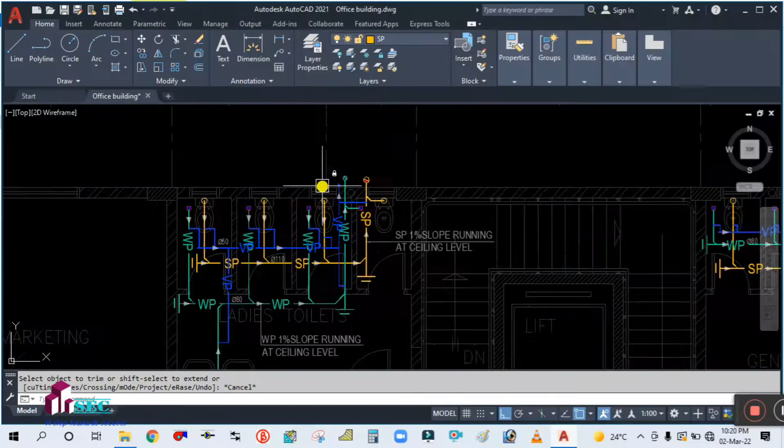As I said in my previous tutorials, we have to do the double line drawing for the first floor as well. So similarly we have to start now.

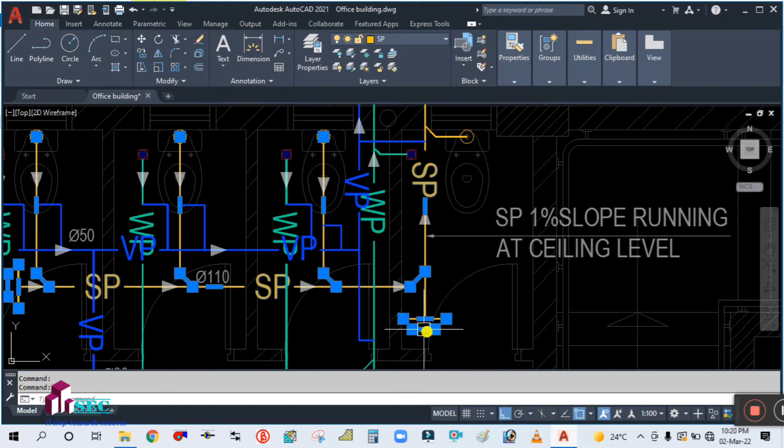So what you will do in the same process, you have to select all this polyline first. Simply select this one and convert to the normal line. Simply select all these. Then after selecting, go to properties and you can find the line type. Simply go to the line type and select the ByLayer.

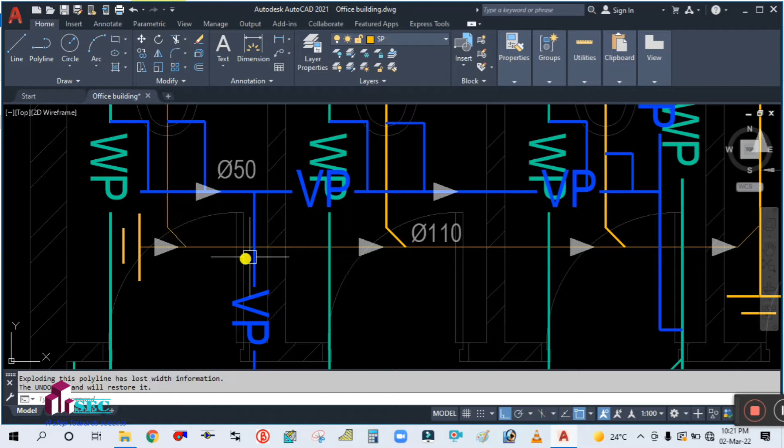Now you need to explode this because this is polyline, so you want to convert into the normal line. Simply select this one, type X, enter. If you want to repeat the same command, no need to press X again and again. Simply select this one and press enter to repeat the command. Select, press. It's very simple.

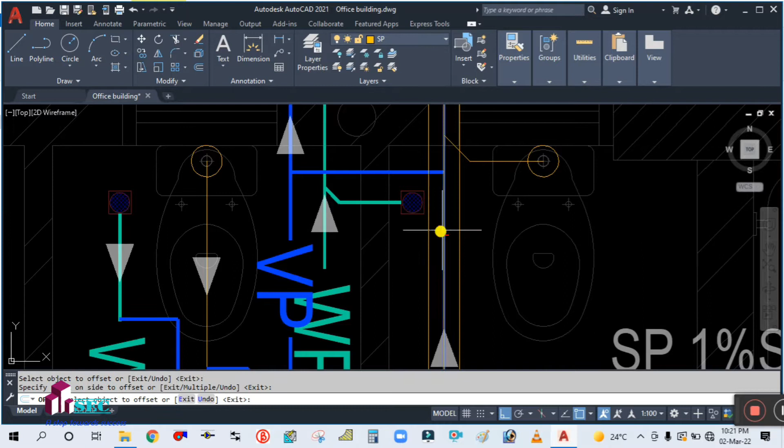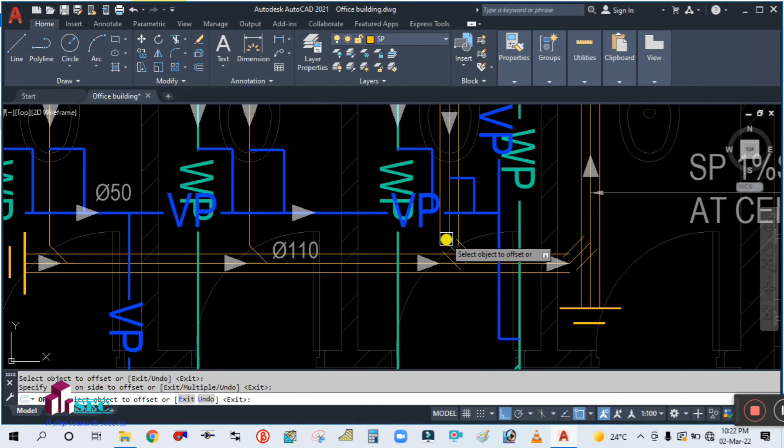Select and press it. Now we have to offset this one, 55 mm each side. Simply offset. It's very simple. Simply select this and offset like this. Simply select this one, offset, select, offset.

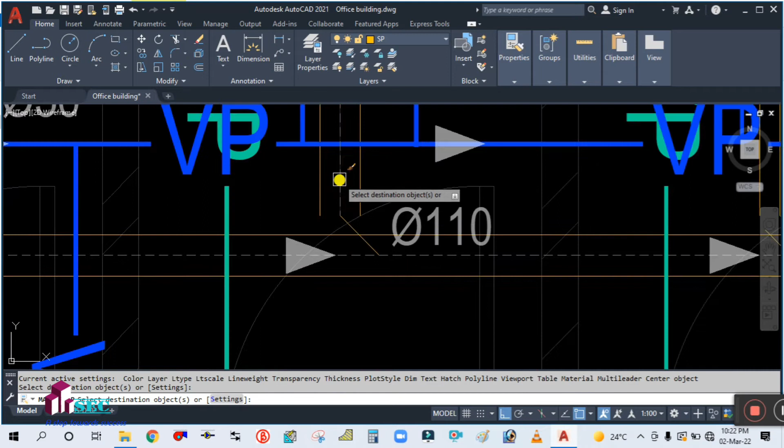Now match this one first. So simply type MA and select the excess line from here, and now this time you need to match this. Simply match this one, match, there you go, match this.

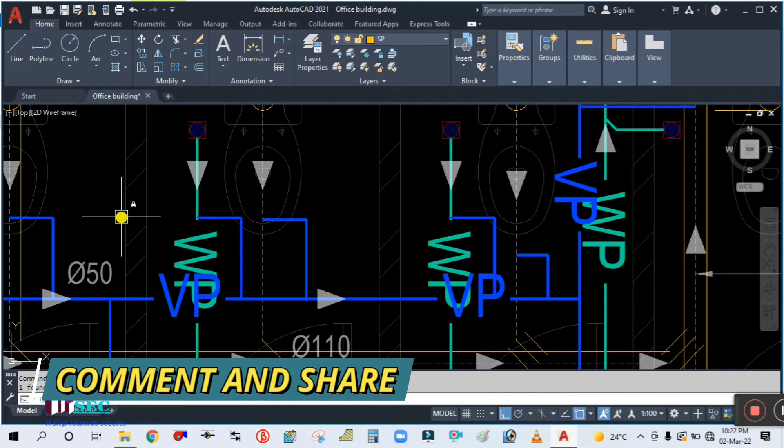Now what you will do, we have to simply erase this one because we are going to copy paste. So no need this line. I am going to remove this.

Now we have to simply copy this fitting from here. Simply copy this one also, from here, up to here.

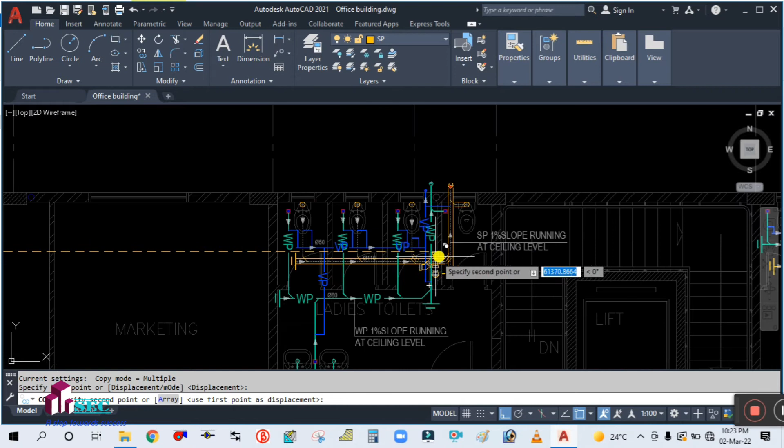There you go. Now what you will do, simply move this. Type M, select this and this also, and now select the center point and place it here.

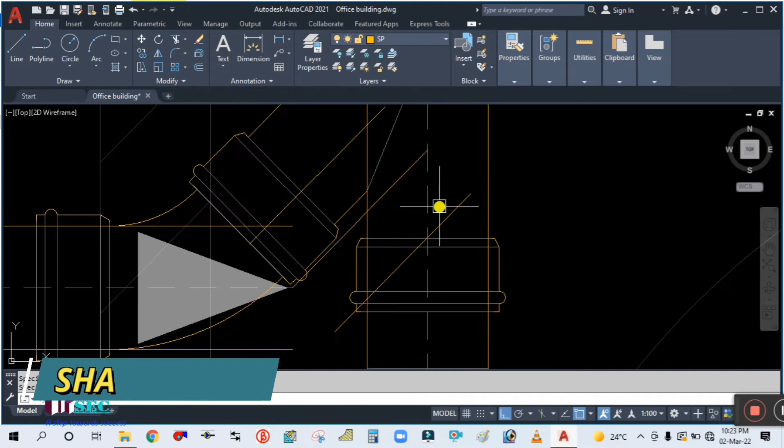Now we have to erase this one, the center line, and then you have to trim. So type TR, select this and this edge, enter, then select like this.

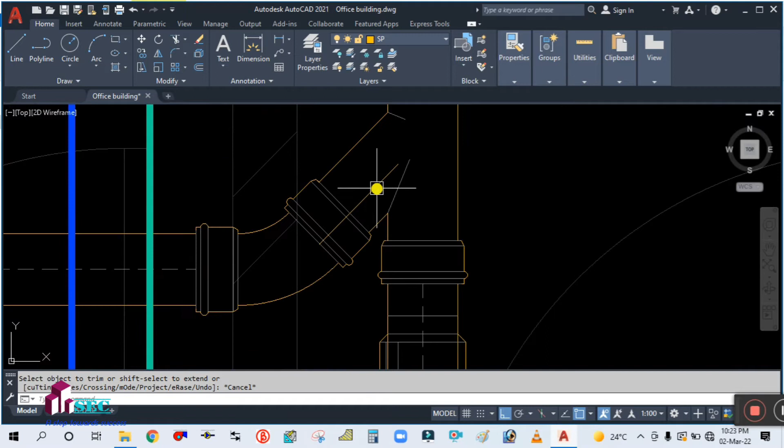There you go. Now you have to select this one and erase it. Now again TR, select this edge, now trim this. Now select and erase it.

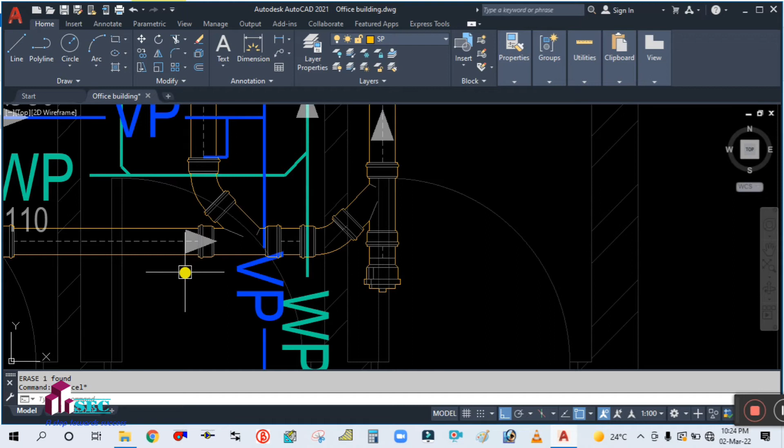Now we have to copy this one again. So go to this first floor, ground floor, and type CO, copy. Copy this one, and also you need to copy this. Very good.

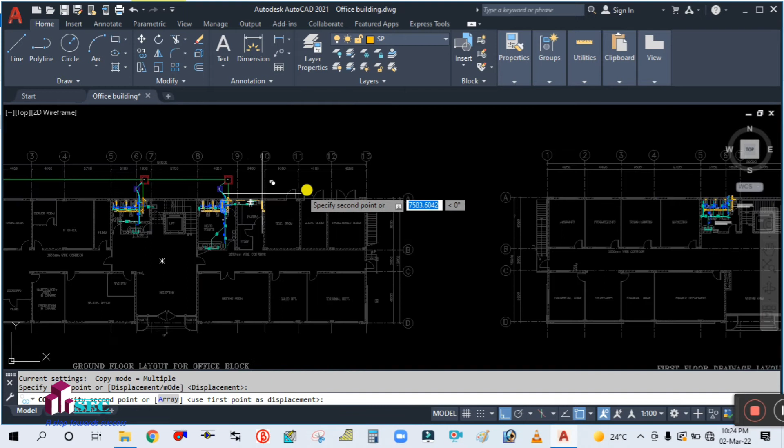So now this time we need to copy from here. Then simply go to this first floor and place it here. That's it, very simple. It's going to be placed very perfect.

Now you have to erase this. Select this one, erase it. It's perfect.

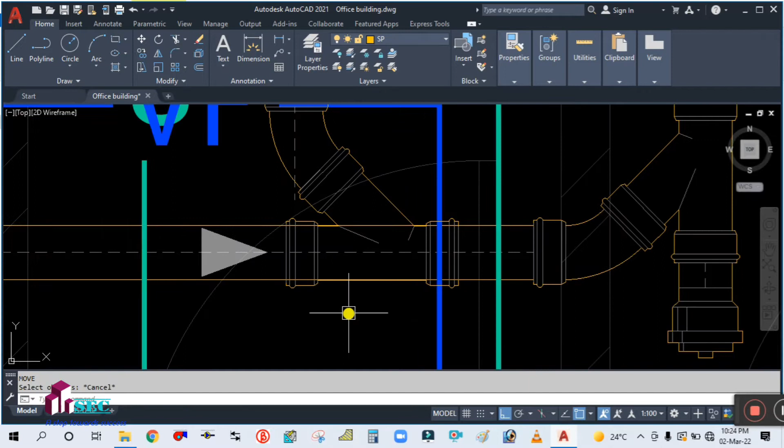Little bit need to move, so select this one. Select this and move a little bit because it's not perfect at center. Now it's placed perfectly.

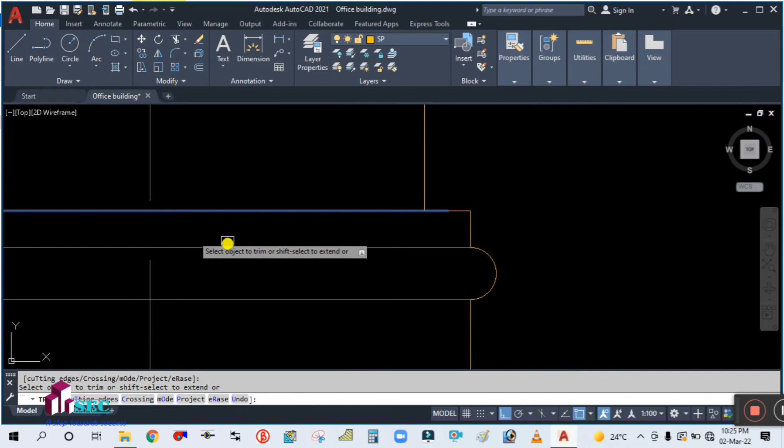Now you have to trim this, select this line and trim this one and this also. Again select this, again trim, press TR, enter, select the edge and then trim this. Very good.

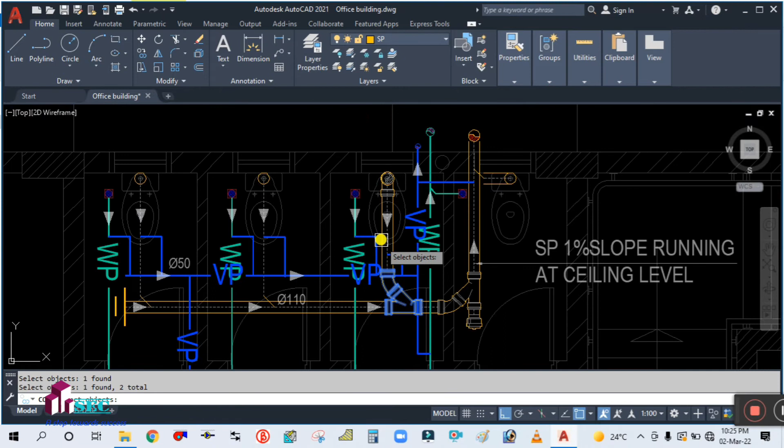Now what you will do, simply copy this one. Type CO and copy this. Also this two line need to be copied, and this connection needs to be copied. There you go. Now from here you need to copy and place it here.

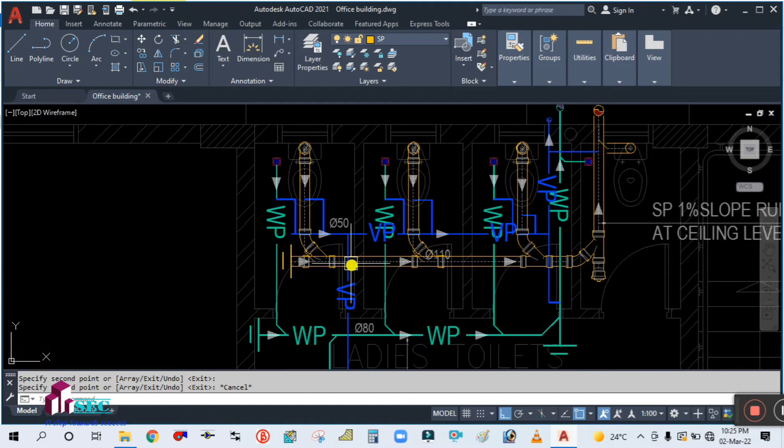Very simple. So this single line drawing is most important. If you made the simple single line drawing, it is enough for the design engineer, and the shop drawing has to be prepared by a draftsman only. But you should have knowledge for this also.

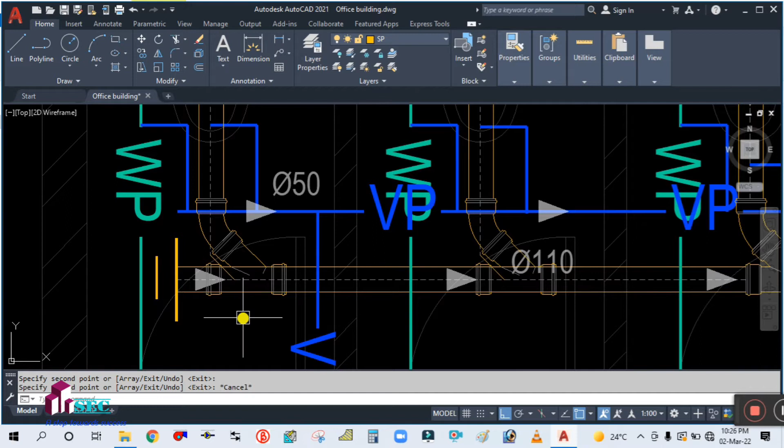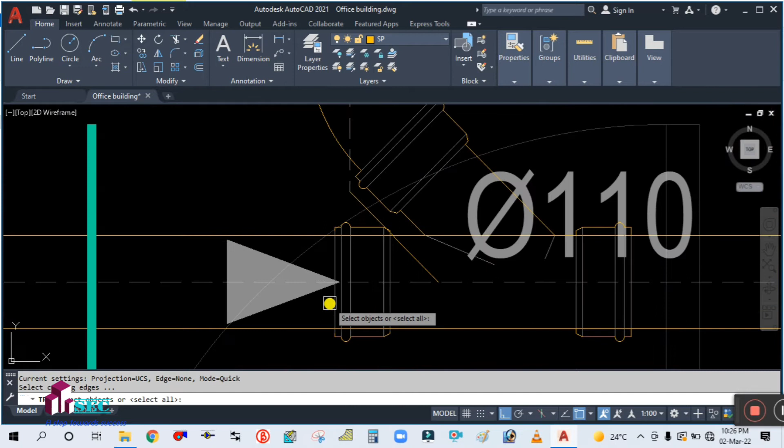Now simply trim this. If you prepare the single line drawing, that's enough, but based on the SLD drawing, you need to prepare the shop drawing also. Now trim this one, simply select and type E, enter, simply erase this. Now TR, select the cutting edge, press enter, now simply select this, erase this one. So this is also over.

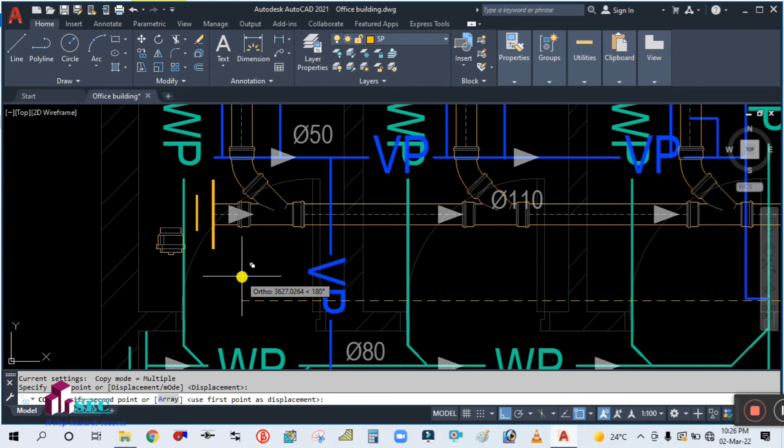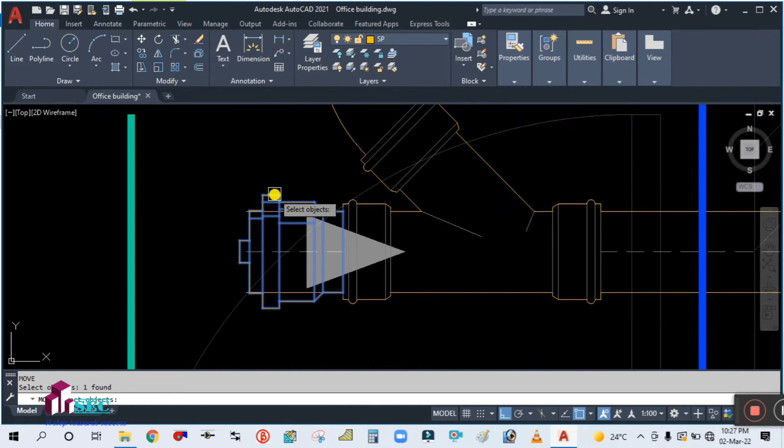Now we have to copy this end cap, place it here. Now you have to move down and rotate this. Type RO, enter, move this one, select from the center and place it here. Now erase this end cap. Now we have to move this one, type M, 50 mm, enter. Now TR, cutting edge, erase it. Very good.

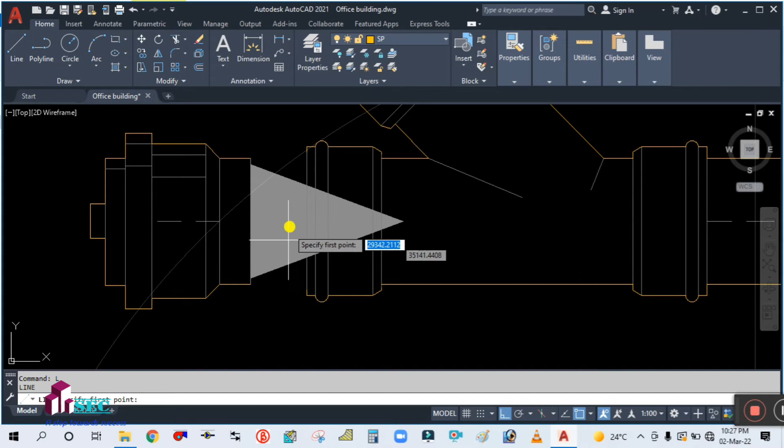You have to select this line to here, so this one. Very good. Now we have to save this one, and for this also you need to...

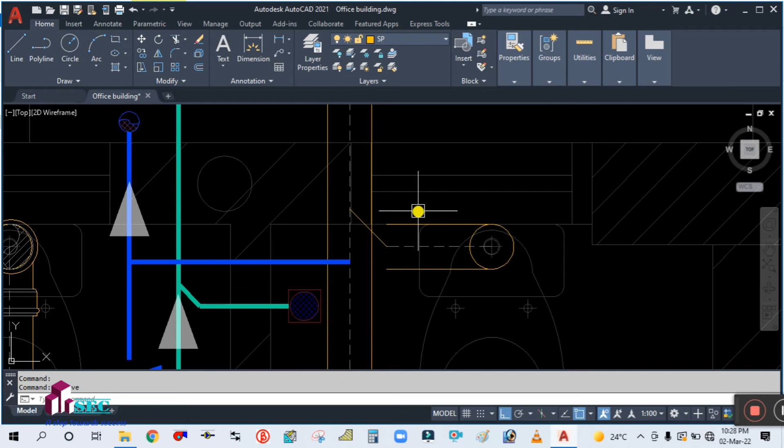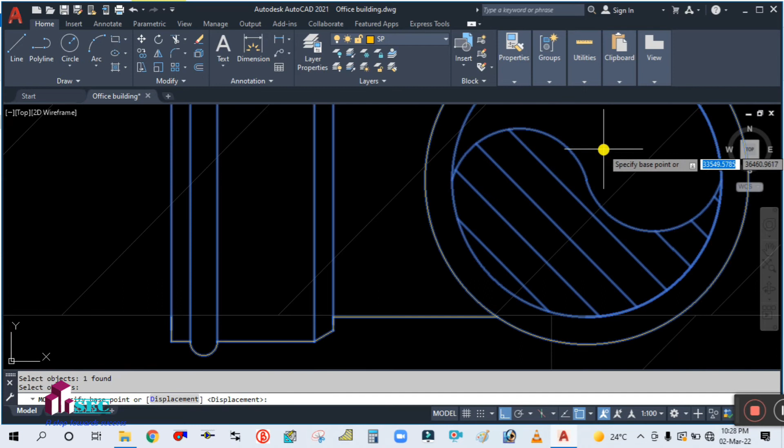Simply select this one, this connection, and rotate this, simple rotate this. Now move this one from here, center, and place it here. Very good, here.

Now simply extend this, here, and offset, 55 mm, like this. Very good. Now simply extend this one, and simply trim the extra line.

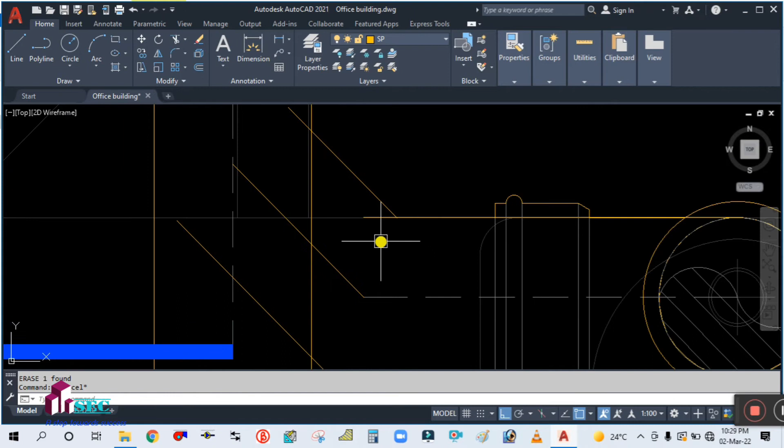Now simply select this, and erase it. Very simple. Now trim this one, erase it, also this one. Very simple. You can connect like this also.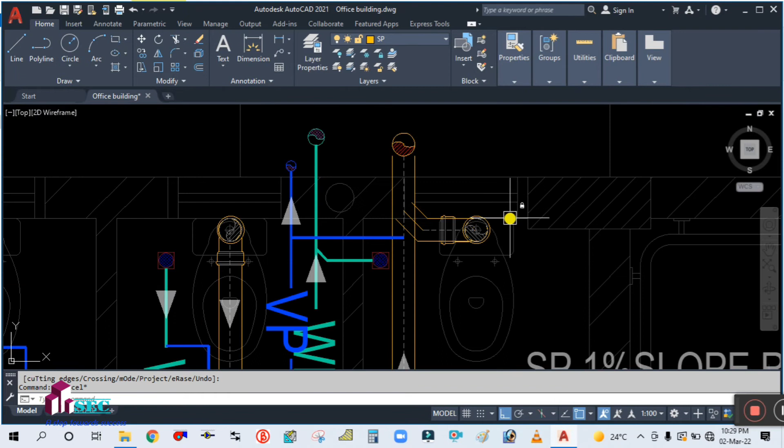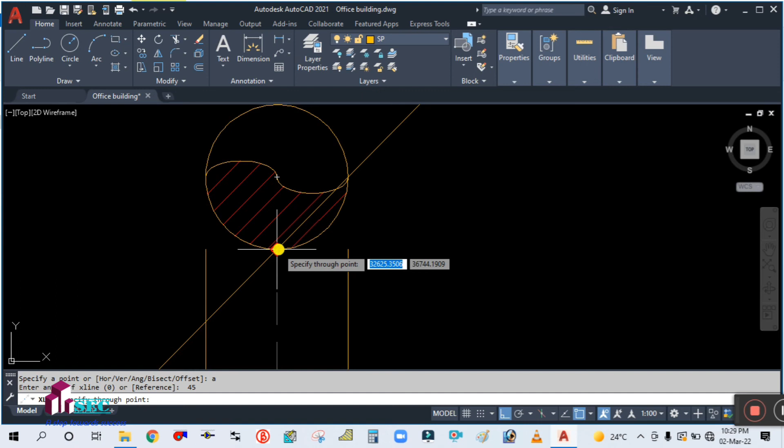Otherwise, what you will do, simply take one line from here, XL, construction line, and angle 45. Then mirror this one, so from here, and erase this. It's very simple.

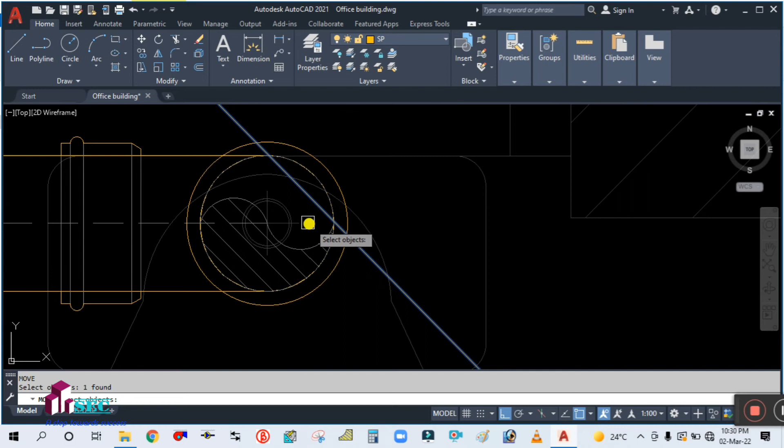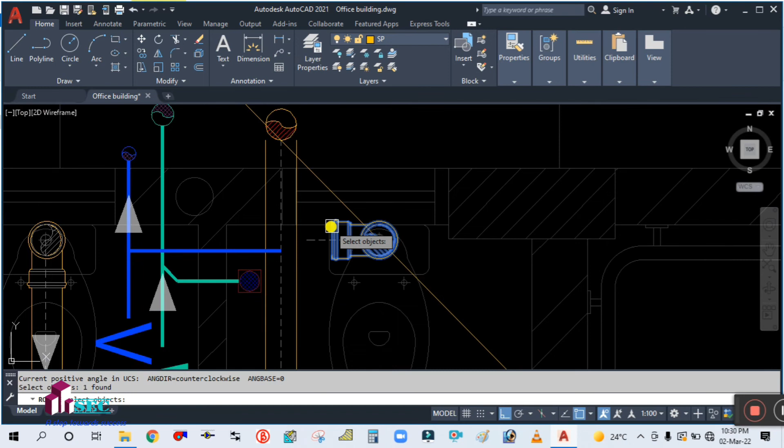Now what you will do, simply move this one from here up to here. Now you need to erase this, simply erase this, then rotate this one. Rotation angle -45. There you go.

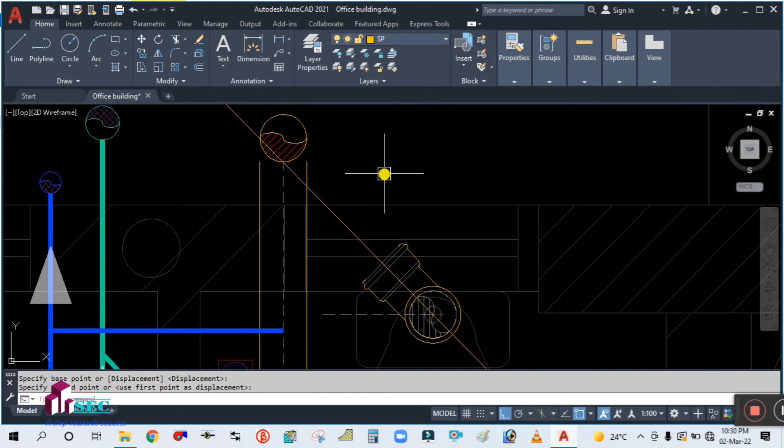Now you have to move this down, or simply select the center point and place it here. There you go. Now simply offset this 55 here and here. Very simple.

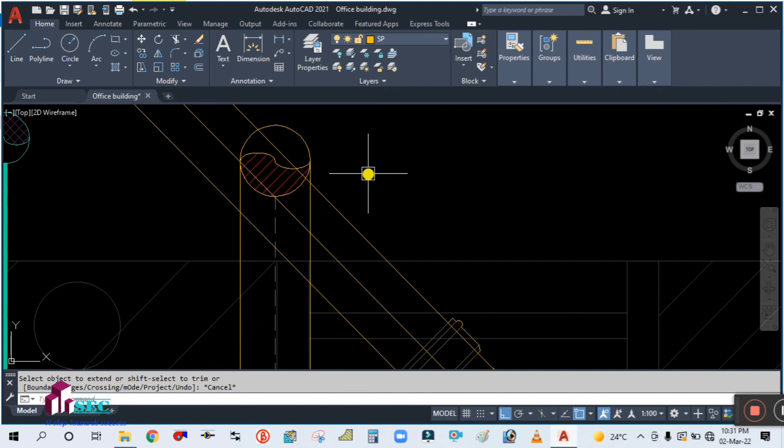Now extend this one, simply extend this, and also this one. Very simple. Now we have to trim the extra line, so this needs to be trimmed, and also TR, use trim command, trim this line, trim this line.

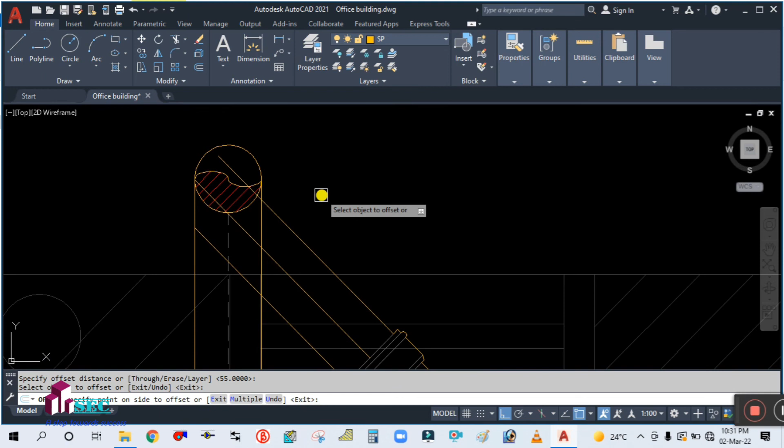You can connect like this also. Simply select this one and trim this. Use trim command and trim like this. You can connect like this also.

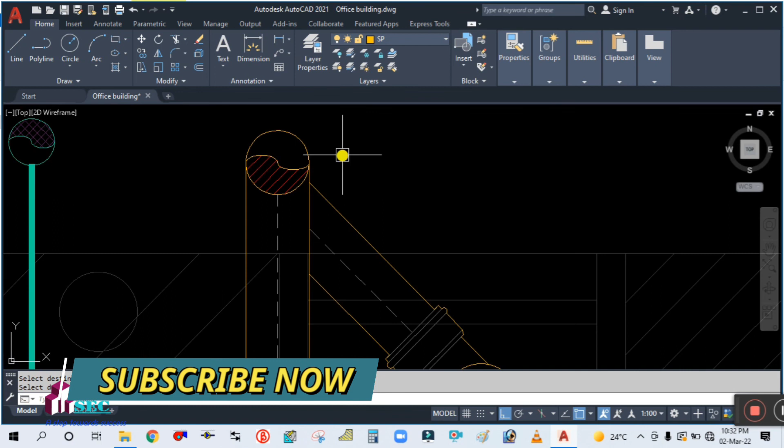Simply type MATCHPROP and match this one, this excess. There you go. Because this T is not fitted here, you can connect like this also at 45 degree. So this is over, and in this gents toilet, I think this is the ladies toilet, so ladies toilet is over.

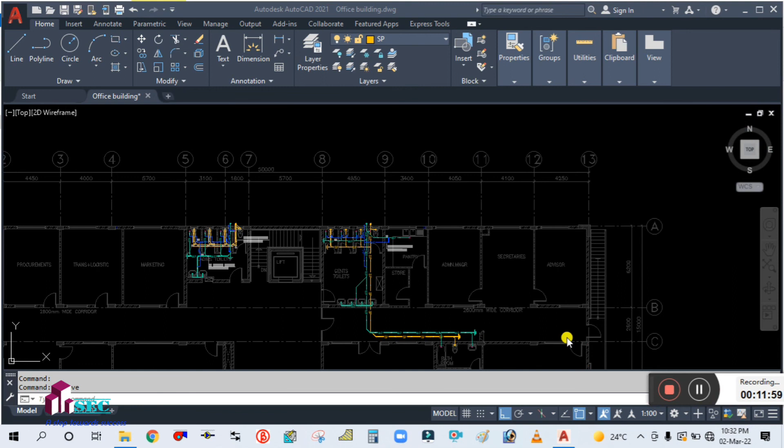So in the next tutorial we have to complete the gents toilet first floor. So thank you guys, thank you once again.